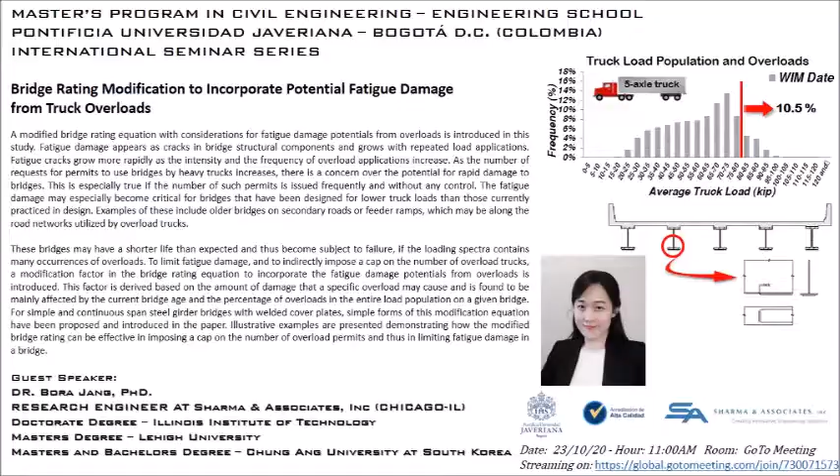Today I'm going to present about bridge rating with consideration for the fatigue damage effect from truck overload.

This is a table of contents for the presentation. First, I'm going to introduce the background of this research briefly, which is fatigue, and then talk about the introduction and methodology of this study. After that, I will give you some examples to show the effect of this research in practice, and then conclusion.

First, I will talk about fatigue briefly. I'm pretty sure most of you already know about fatigue, so I would like to introduce the concept of fatigue a little bit to remind you before taking up the main subject. So what is fatigue?

When the material is subjected to a repeated load, damages in the material gradually accumulate. The process where this phenomenon occurs is what we call fatigue. Although fatigue occurs in any material, its implication has especially been in metal. So in general, fatigue is the process of crack growth in the metal.

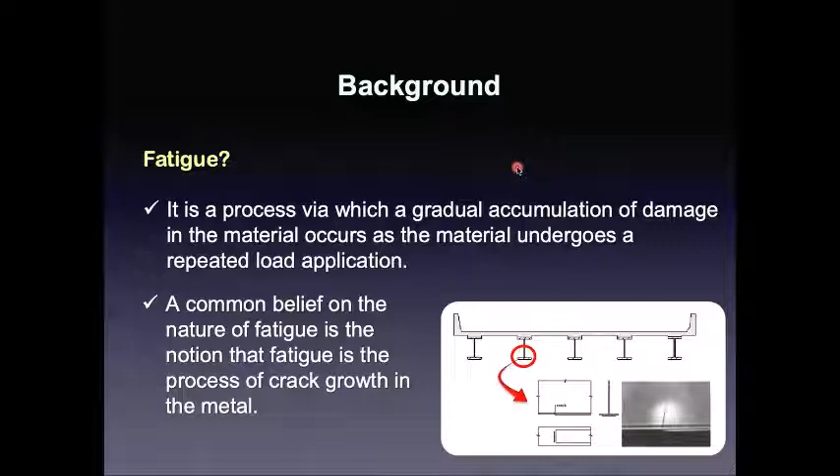In the metal, initially there are many microscopic cracks scattered. The application of cyclic load triggers these cracks and causes them to grow. With the right condition for the metal, a crack will find a path and keep on growing until it passes through the material's effective cross-section and causes failure.

It seemed logical to believe that the growth and the final crack paths are random. However, certain conditions are especially ideal to trigger an unexpected path for the crack. The representative conditions to predict the path are described in the slide. Especially the last one, the welded connection, which is considered in this study, is one of the critical fatigue details.

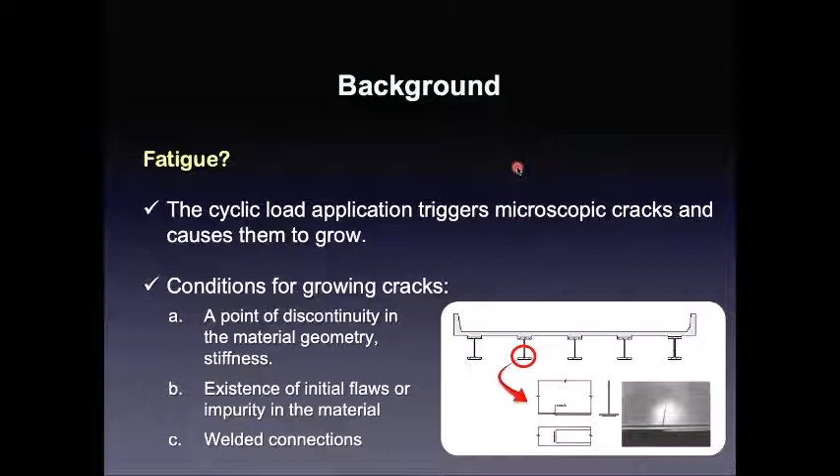There are two types of fatigue damage: low cycle and high cycle fatigue. High cycle fatigue occurs under low stress levels. This means the stress is sufficiently low such that there is no permanent deformation in the material. Therefore, the failure is by crack development and growth.

Each cycle of the load is believed to cause an infinitesimally small amount of damage in the material, and the total number of cycles needed to cause failure depends mainly on the intensity of the applied stress range. On the other hand, the larger the stress ranges, the lower the number of cycles required to cause failure. The other type of fatigue damage is low cycle fatigue.

It occurs when there are only a few loading cycles that stress the material into and beyond the yield. Each loading cycle will result in a certain amount of permanent damage in the material. Its failure occurs when the total accumulated damage exceeds the ultimate strain capacity of the material.

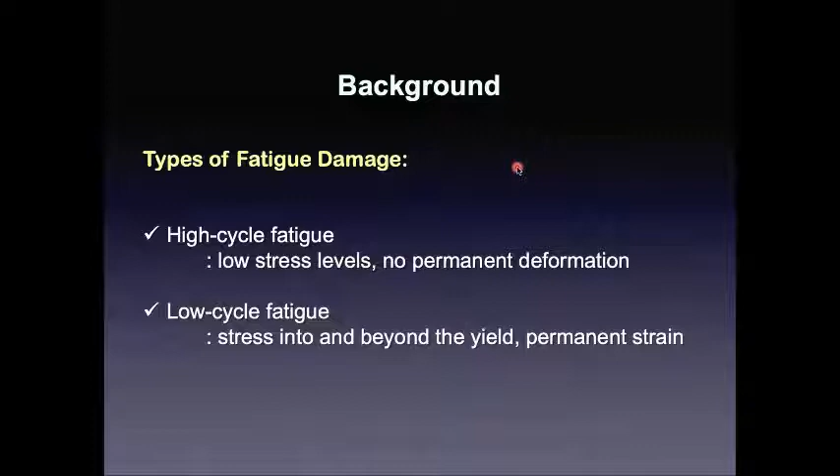Usually this type of fatigue failure, the low cycle fatigue, does not happen in bridges under traffic load. However, the potential for the low cycle fatigue mode of failure exists in bridges in active seismic areas.

In general, for bridges under traffic load, it is the high cycle fatigue damage type. So the fatigue damage in pavements and bridges grows more rapidly under higher load.

As the number of requests for permits to use bridges by heavy trucks increases, there is a concern over the potential for fatigue damage from overload to the affected bridges. The fatigue damage potential may reduce the service life of the affected bridges, and also results in costly repair and replacement. Special attention will need to be paid regarding the potential for accelerated fatigue damage due to truck overload.

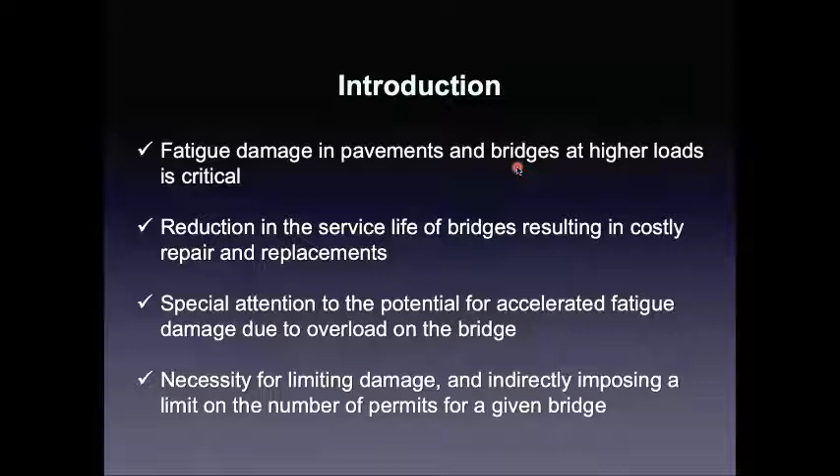Therefore, it is necessary to limit the damage and indirectly impose a limit on the number of permits for a given bridge.

According to the NCHRP report, which is the National Cooperative Highway Research Program, the frequency of overloads is consistently growing. The figure represents the number of permits counted annually for overweight and oversized trucks.

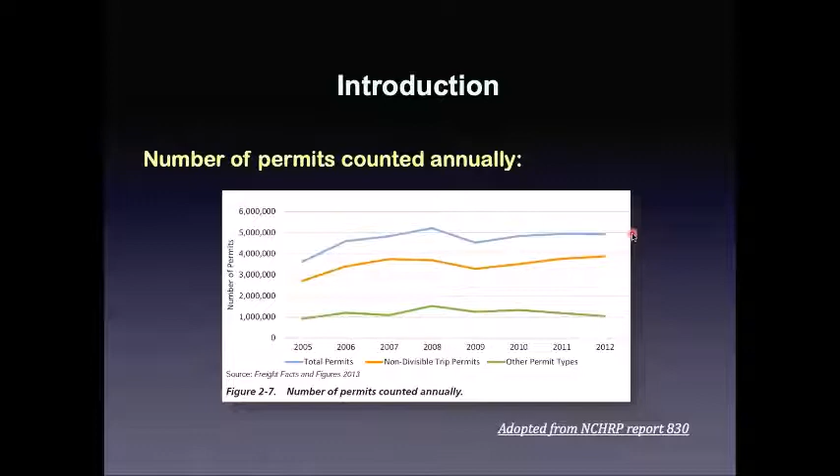Please look at the blue line, which is the total number of permits issued. Despite the dip experienced during the Great Recession, it shows an almost 36% increase in the total permits issued from 2005 to 2012. Apparently, overload and its potential for accelerated fatigue damage have to be considered in bridge assessment and management.

Note that the overload used in this research refers to truck weight in excess of the 80 kip limit, which is like 356 kilonewtons.

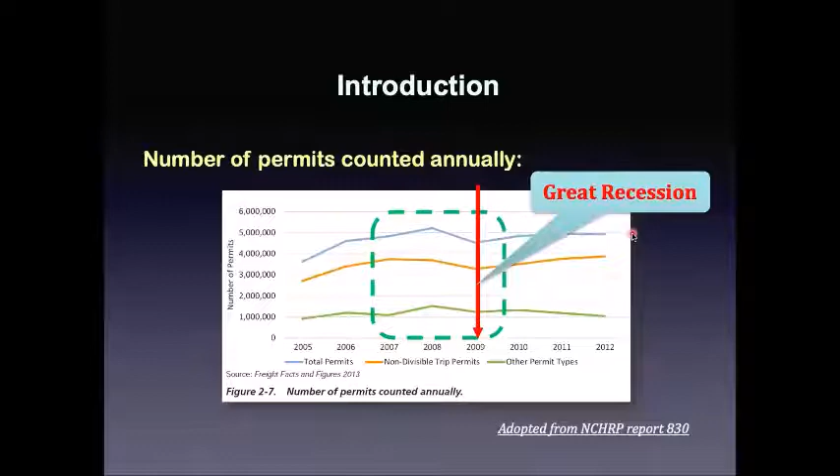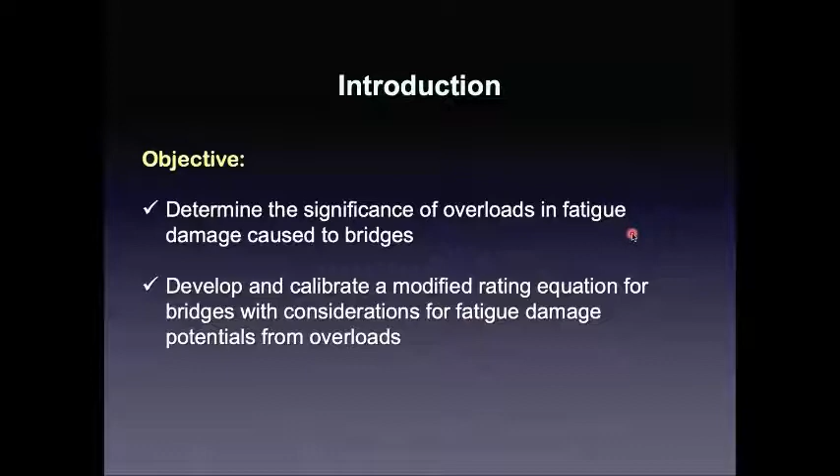Therefore, the objective of this research is to determine the significance of the overload in the fatigue damage caused to the bridges, and also develop and calibrate a modified rating equation with consideration for the fatigue damage potential from the overload.

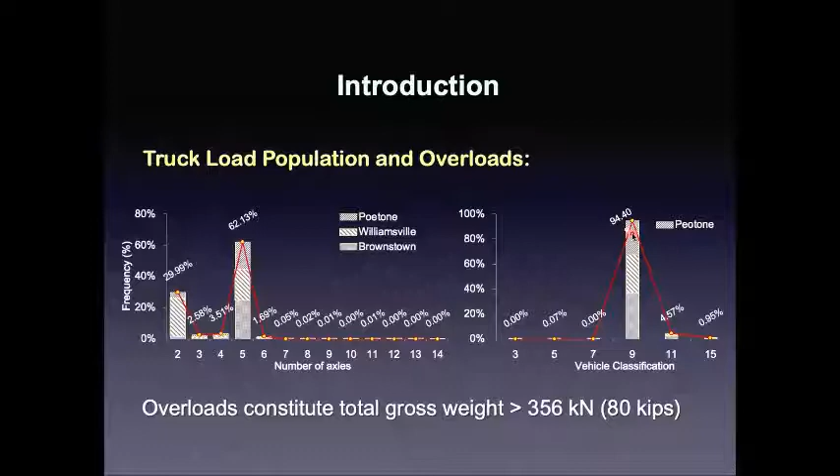According to our interest, there are truckload populations for 5-axle trucks from the weigh-in-motion data. The weigh-in-motion data is collected by the Illinois and Michigan Departments of Transportation from June 2014 to May 2015, for a year of data.

As shown in the figures, the populations mostly exhibit an inconsistent pattern with 2 or more distinct peaks. This is because of the variety of load in the population. In other words, the appearance of the 2 peaks may be due to a combination of loaded and empty trucks in the mix, and also the load data contains a frequency of overload.

If we look at the distribution, it shows that the overloads are more than 10% of the total truckload population. It is rather large and can be very critical for certain bridges with critical components prone to fatigue damage.

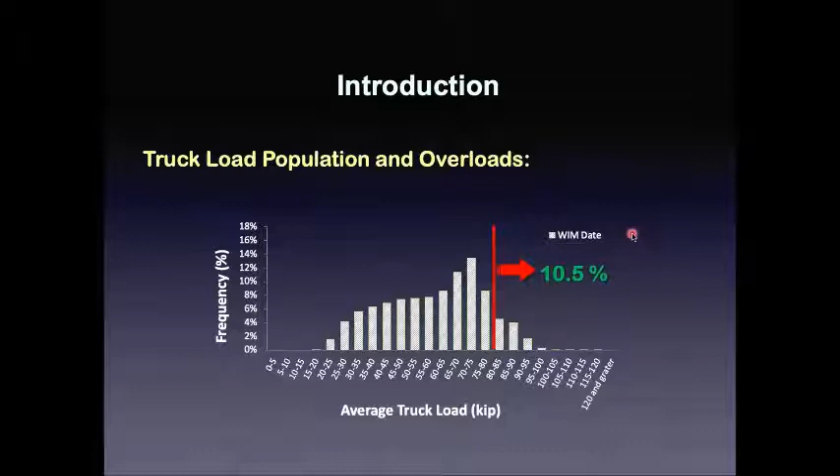As I mentioned earlier, generally the fatigue damage in steel structural members of the bridge is caused by cyclic stress range developed as a result of periodic truckload applications. It is mainly affected by the load intensity and the frequency of the stress range at the critical component.

In this study, we are especially focusing on the damage that can occur to the bridge due to truck overload. So the service life of the affected bridge will shorten when the fatigue damage due to the overload becomes significant.

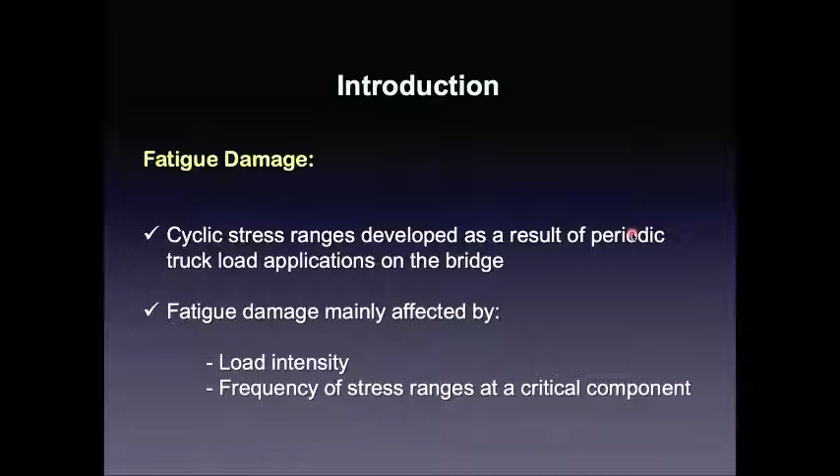So how can we compute the fatigue damages? The fatigue damage can be determined by using Miner's rule and the SN relation. So for the damage accumulation, we compute the ratio of the applied to the available number of cycles, and then sum up those ratios.

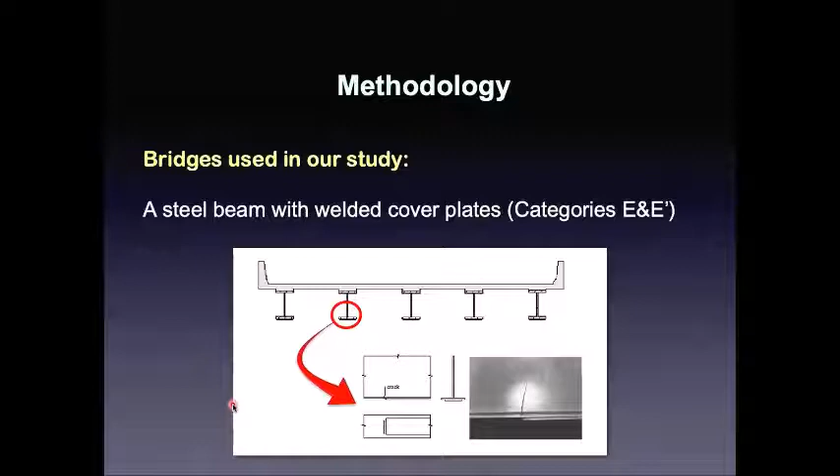So now, using Miner's rule and the SN relation curve with the stress range distribution, the annual fatigue damage due to the truck overload can be estimated, which is fatigue life expended. We use FLE for this variable.

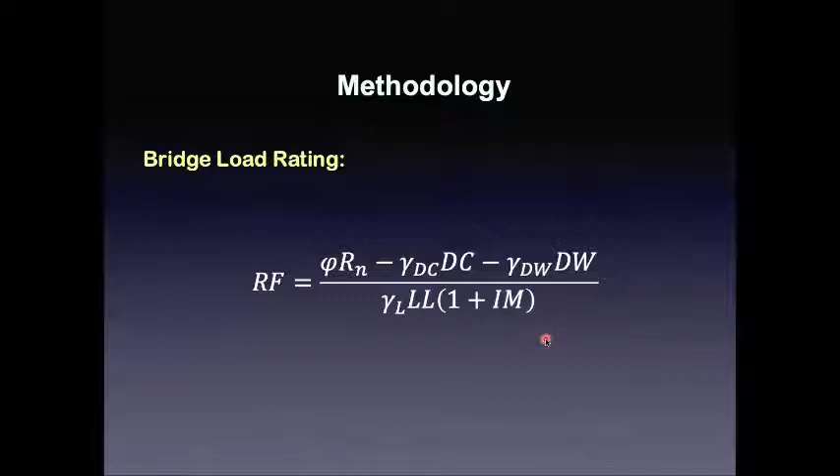For the purpose of permit load rating, the rating factor represents the safety and serviceability of a bridge by evaluating the effect of the passage of the truck overload. Generally, a rating greater than 1 is considered satisfactory unless otherwise specified.

Therefore, we suggest a fatigue index factor in the rating equation to control the additional fatigue damages from the overload. This factor does not affect the conventional rating equation; it is a kind of additional parameter. We use αFLE to represent the fatigue index factor and account for the significance of the fatigue damage potential due to the truck overload.

Basically, this fatigue index factor is related to the fatigue life expended, which means it is mainly affected by the type of the fatigue critical component, the stress range from the overload, the number of stress cycles, and also the accumulated damage in the component.

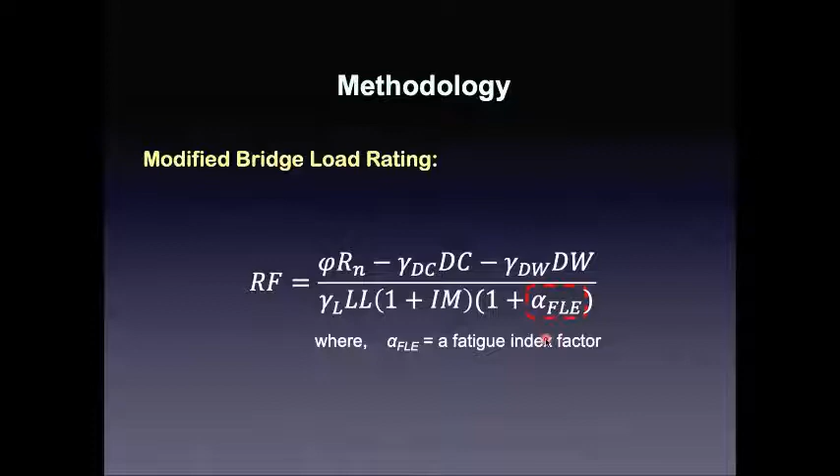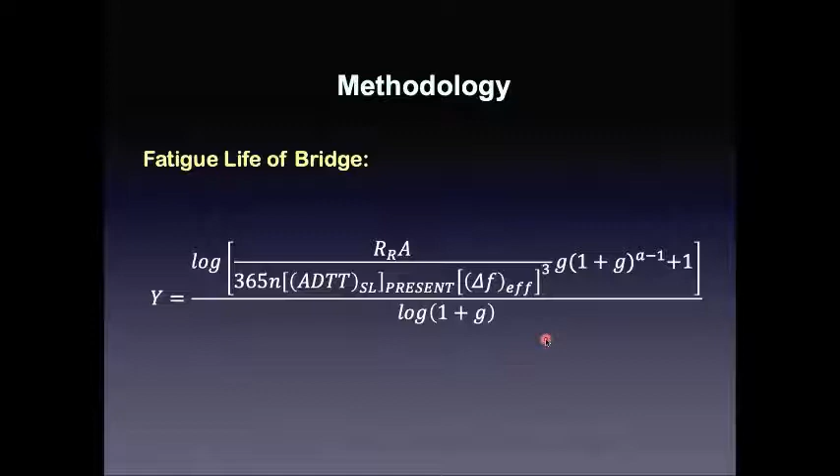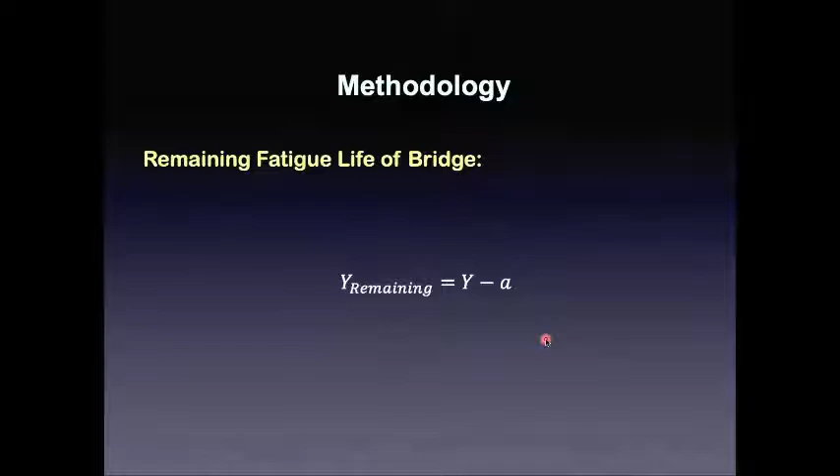These parameters also affect the fatigue life of the bridge, as shown in this equation. The estimated fatigue life can be used as a convenient method for estimating the fatigue index factor αFLE. The remaining fatigue life can be determined by subtracting the current age of the bridge, A, from the fatigue life, Y.

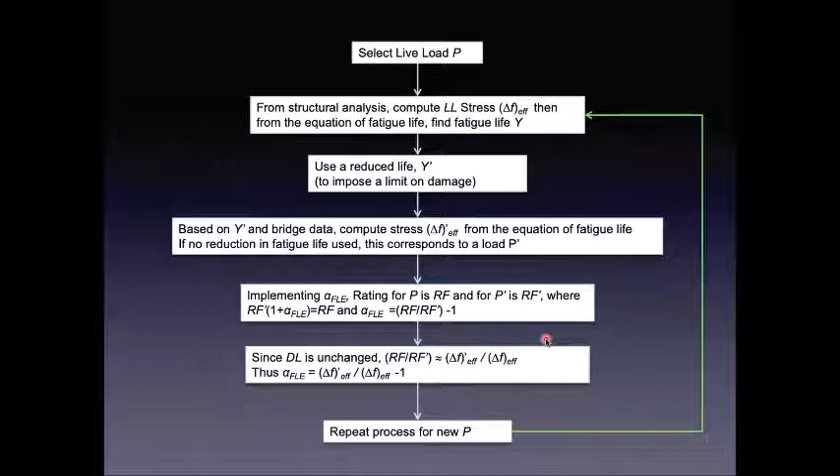From the database generated for the alpha FLE, the fatigue index factor, we found that among several parameters, the current age of the bridge, gross vehicle weight, and the percentage of overload particularly affect the fatigue index factor.

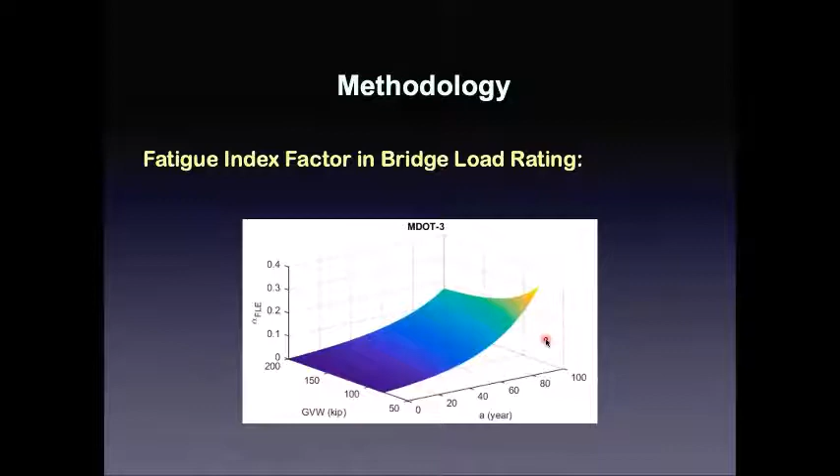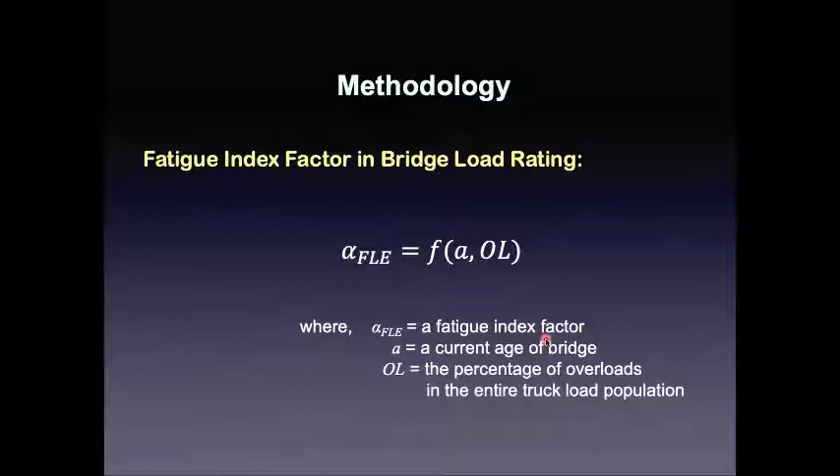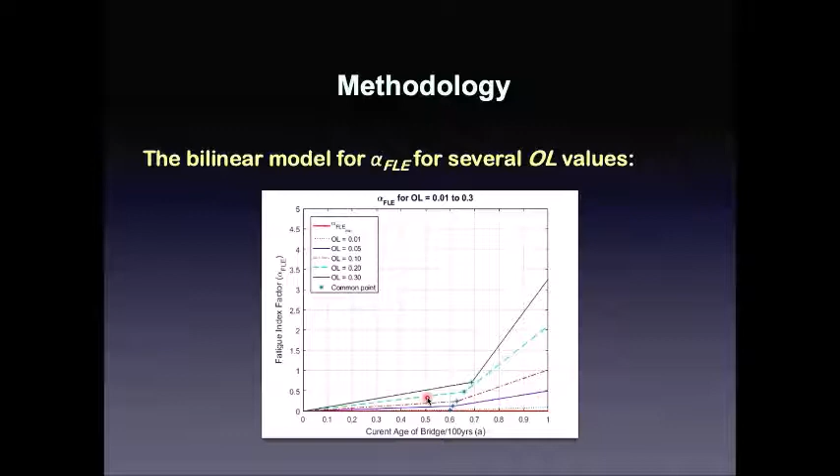Using this concept and equation, I'm now going to provide examples to show the effect of the proposed rating equation with the fatigue index factor. This is a simply supported steel girder bridge with a welded cover plate corresponding to fatigue detail category E.

Using the equation we proposed, the value of alpha FLE is 0.249 for case 1 and 0.076 for case 2. That value is affected by the percentage of overload and also the number of ADTT.

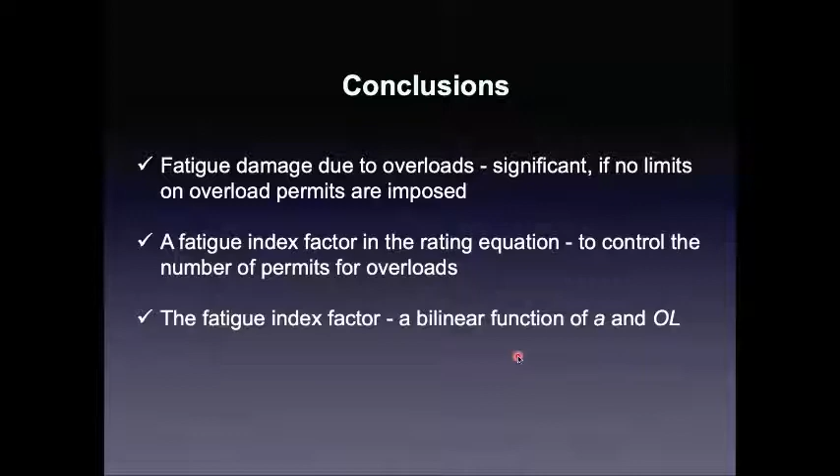So if the modified rating equation is used, we expect its contribution and some benefits. First, it will result in preventing bridges from experiencing a shorter service life. And also, it is expected to have major economic benefits to bridge owners by minimizing the need for early bridge replacement and frequent repair and rehabilitation.

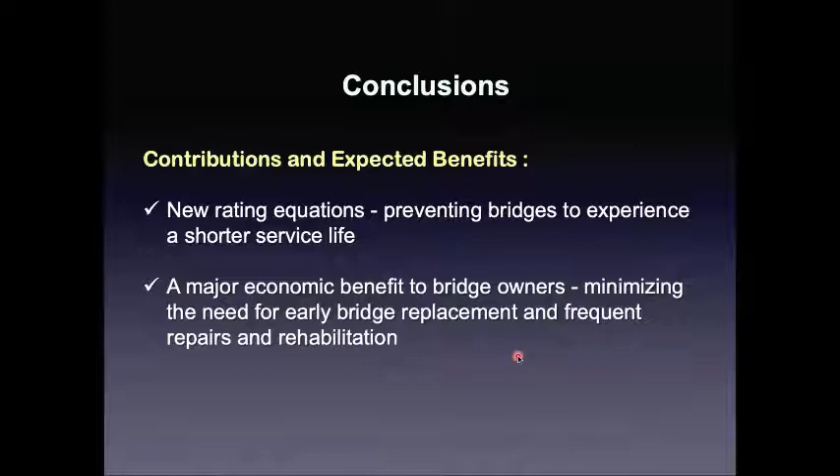So at the end of the presentation, we appreciate the assistance provided by David Thompson of Illinois and Thomas Forts of the Michigan Department of Transportation in making the weigh-in-motion data available to our research.

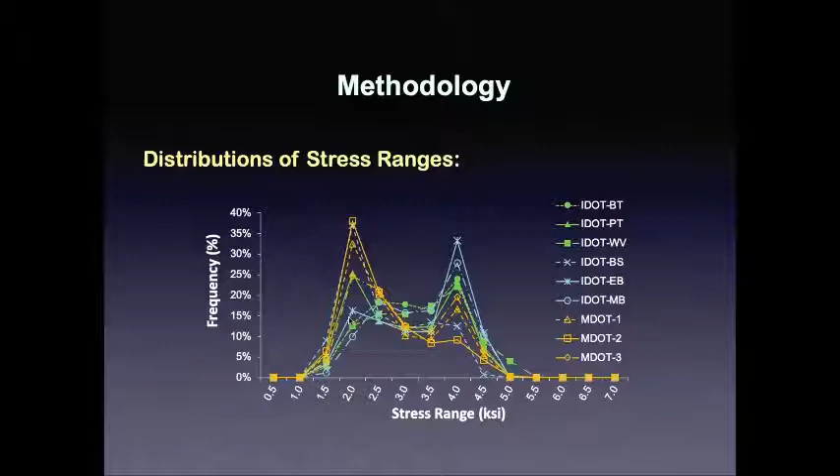So first, you need to find what kind of truckload population is in your location, and then compute and conduct a structural analysis corresponding to each truckload.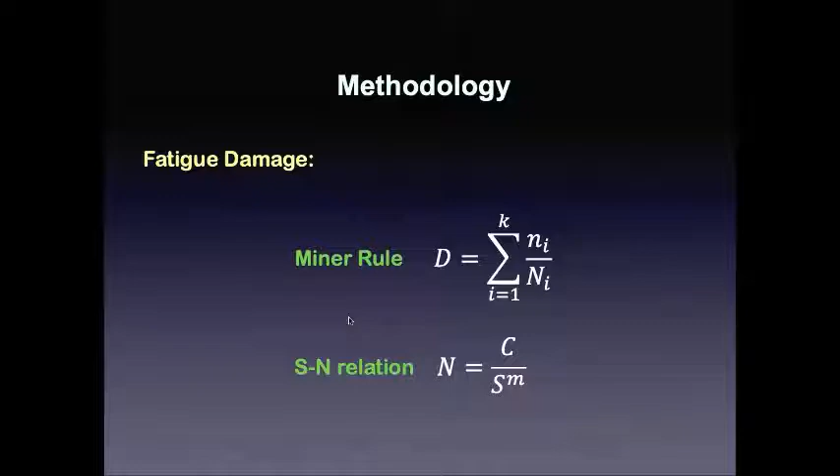Okay, I understand that. Another question that comes to mind: for how long? What was the period of time that this data covered doing truck checks with the weigh-in-motion? How long was it? Is one week enough? Maybe a month is too long? How many days should I do this to have a reliable number of truck pass data so I can start my calculations and compute the fatigue life expended?

Right. We consider actually a year of data, because in general a year has 4 seasons, 4 terms. So each term, like summer or spring, you have so much construction. You may have more overload trucks than the other period, like winter. So to consider those parameters affecting the trend of the truckload distribution, you need to consider at least a year of data.

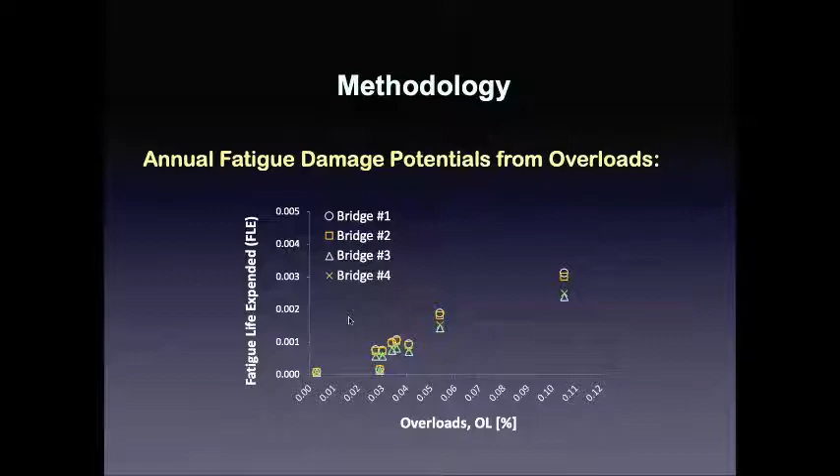Okay, yeah, that's right, you're right. One last question, let me check. Okay, one last question that I have, Dr. Yang: can you go to the example curves where you have the relationship between the FLE and, I think it's the gross vehicle weight?

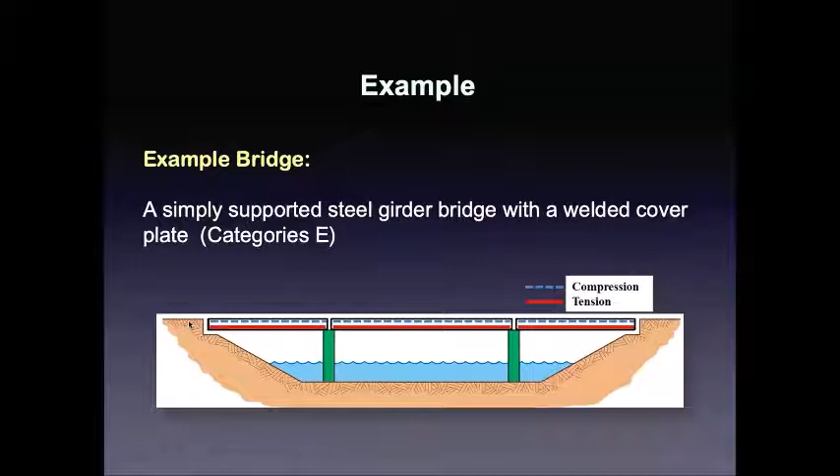So this graph was done applying the methodology to a real bridge, right? Yes. Okay, a simply supported beam bridge. In this bridge it was a steel girder with a cover plate and a concrete slab on the upper part.

Right, all right, okay, that makes sense. And we can apply it - we have a couple of bridges here that we can still apply it to. And no, that was my question. My question was: has it been tested on a real bridge, and how big is the impact in terms of the bridge rating?

And there's Dr. Consuegra, he has a question. Yes sir, I'm reading, if you're okay. It's the room is yours, Professor.

You are free to ask. Yeah, I just realized that I have the capability of opening my microphone on myself. So that's okay, good. That I didn't open up the microphone when I was doing something else here in the room. So good to know.

Question, Dr. Jan, thank you for the presentation. Very interesting and very nicely concise, which, as the professor just said, is very appreciated. We are tired of very long presentations, and often it's better to have a concise presentation. I wanted to ask you something. I'm not really a steel guy.

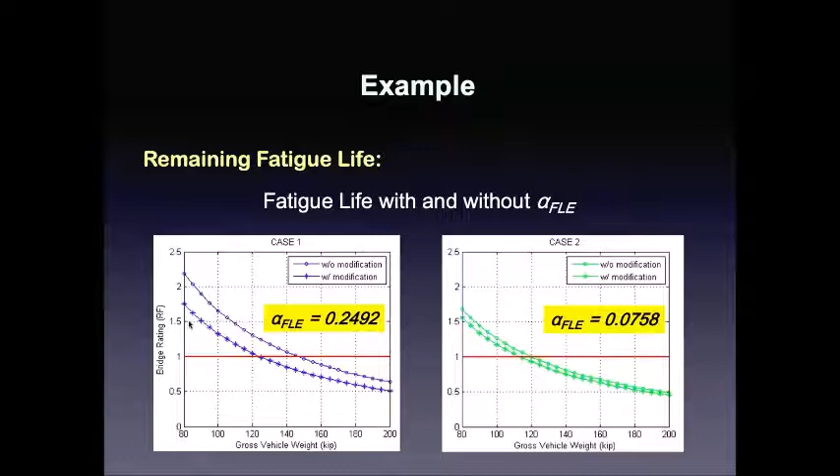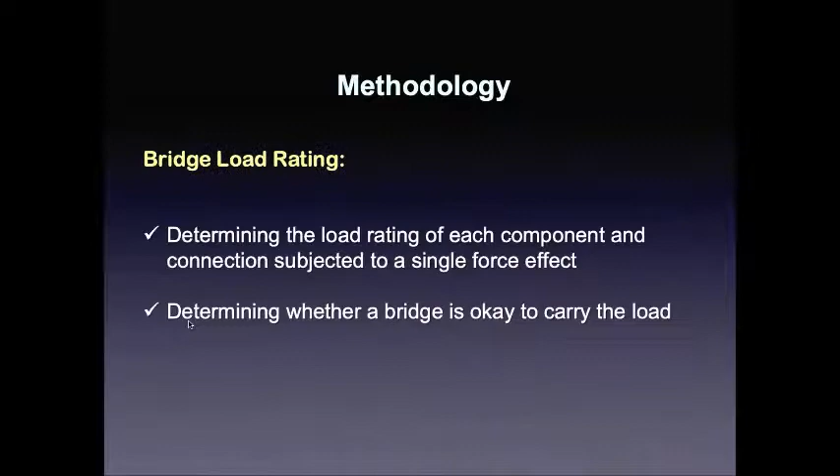As far as I understand, fatigue is a phenomenon based on this type of information plotted in an SN curve, right? Which is based on experimental observations, numbers that are measured, the stress level related to the number of cycles in structural steel. I made the comparison with concrete, and I know concrete fatigue is not as well known a phenomenon as it is in steel.

To get right to the point, my question is: do we have enough information right now to be confident about the SN curves for any kind of steel, at least the type used for bridges? Or does our research continue to rely heavily on experimental data to recreate these SN curves? I don't know if I'm making myself clear.

At first, thank you for your kind words. If my understanding is correct, you want to ask me if the current SN curve is reliable for steel. Yes. Okay, how can I say this... So far, AASHTO has adopted this SN curve, and many areas use it, but it's not about the material itself, it's about the type of fatigue detail.